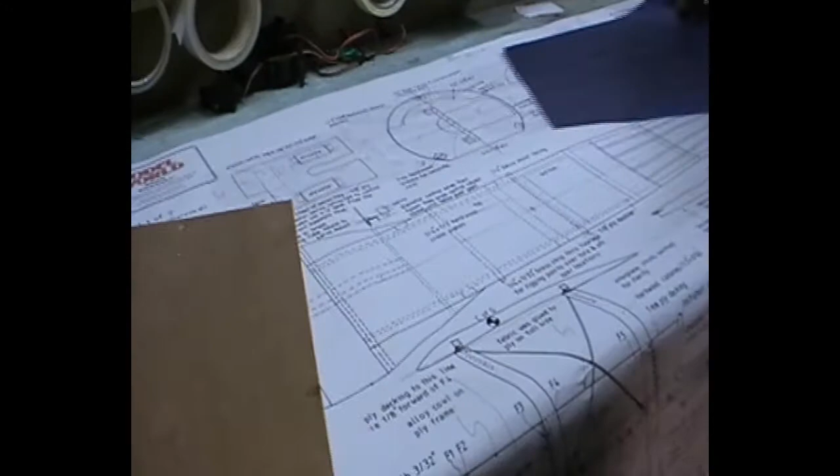Hiya. Right, this is a video to demonstrate the next stage of starting with the plane, getting all the bits ready, the formers and various bits and bobs. So if we pan over to the board, I'm going to demonstrate by doing the main firewall, former one as they call it.

So you just pick a piece of your ply. This is 5-6mm ply thick, because that's what I've got left in the workshop. But personally, if you've got 10mm, use 10mm, because you need the weight up front in a way. The more weight up front, the better it is. That's my theory anyway, though others may disagree.

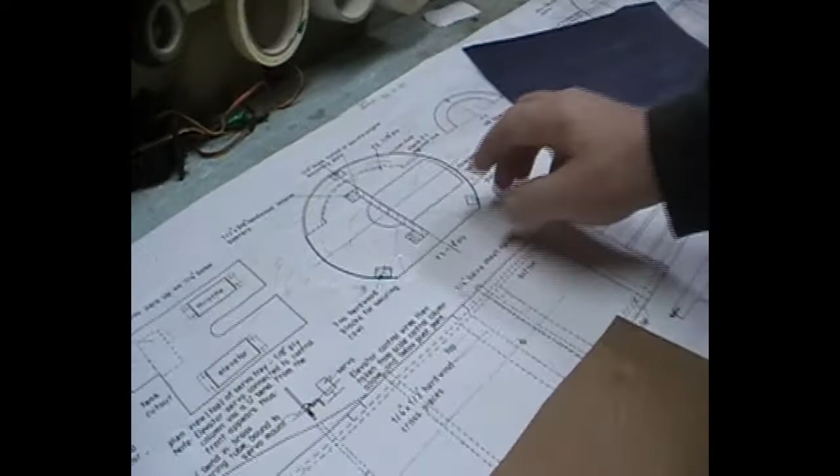So you get your piece of board, there's your picture, the tape's on it like I explained in the previous video, to protect the plan. It's just a little bit oversized, the board, so it gives you a bit of room. I always make two of them anyway, in case I make a mistake installing the engine and stuff. You just feel your way along.

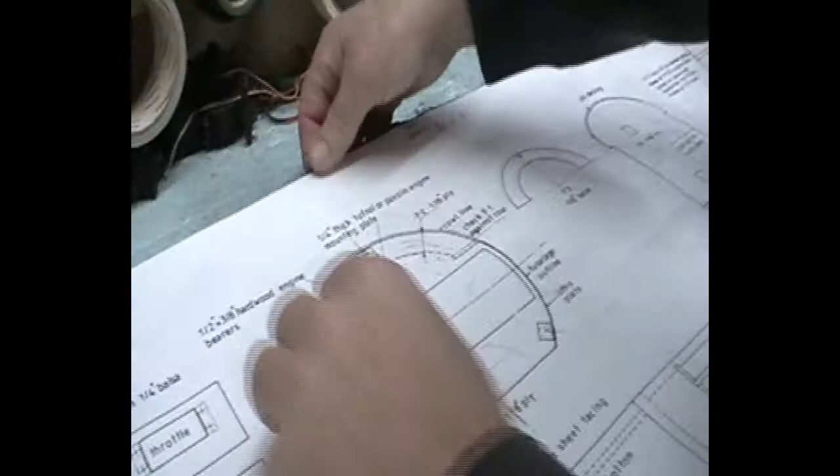There you have it. That's the important thing to remember, the line in the middle that gives you the centre of the actual foot plate. The best way to draw it, just pencil over the tape. Try to make sure the plan doesn't move, because that would be a bit of a pain. Nice pointy edge pencil.

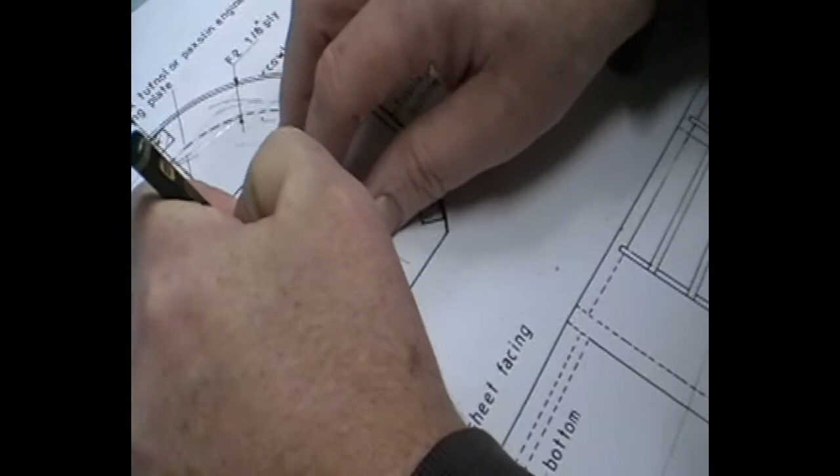Okay, that's right, it's just basically - you just draw out what you want to draw out. There's no point doing this bit and this bit, because that'll come another day.

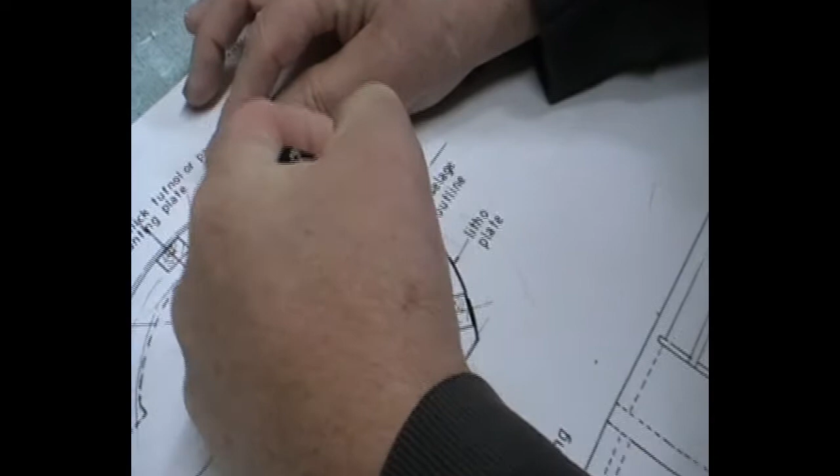And then you just carefully go around the edges, take your time. I'm doing this basically as one who's used to it, which you'll get used to once you do a few builds. Things like this come naturally.

The blue carbon paper may have made a difference. I'm sorry if my arm gets in the way of the video, but you can get the gist of what I'm doing. I've done this before.

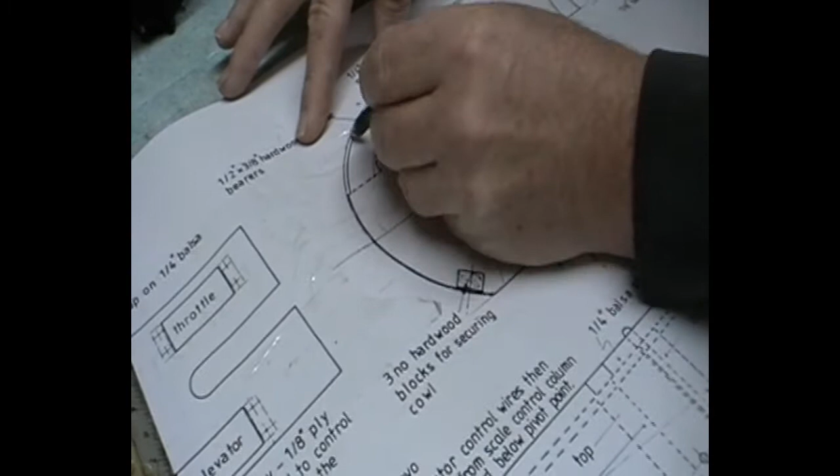Yes, you've got that, and then hopefully it'll come out. There you go, so it's come out now, okay, roughly.

And then what you do is, if you follow it around, I use a jigsaw. If you've got a fret saw and want to do it by hand, by all means, though you'll break it. So you just cut as near to the line as possible.

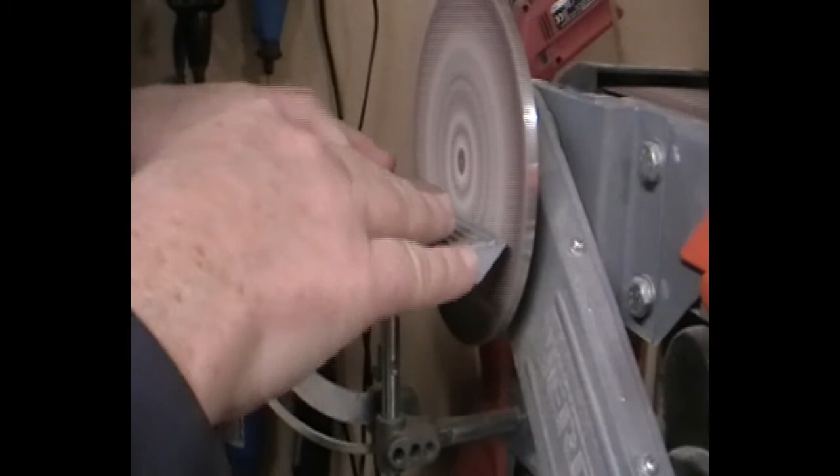So there you have it, right? So you've got your centrepiece there, so you know that's going to be where you decide which way you want to put your engine - upright, inverted, sideways or top.

But then, if you make a mistake, you've got one to play with, and it's the weight, like I said. So that's that.

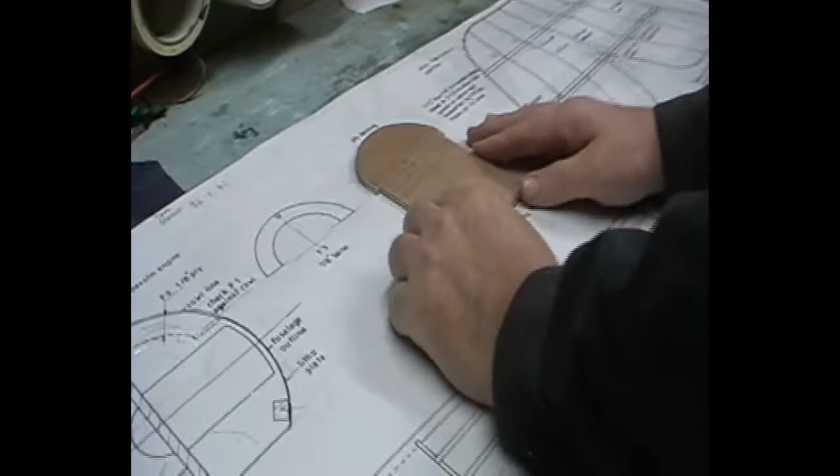And as you can see, I've done all the other formers. Obviously that one goes there, and you just make sure it's true to there. Then you look at everything on your plan, as you have, and you'll see that they're the same there. Repeat the process all along.

Obviously these are balsa, so you can use a blade. And you notice them there, and that's them all up there. Okay, so you've got all your formers.

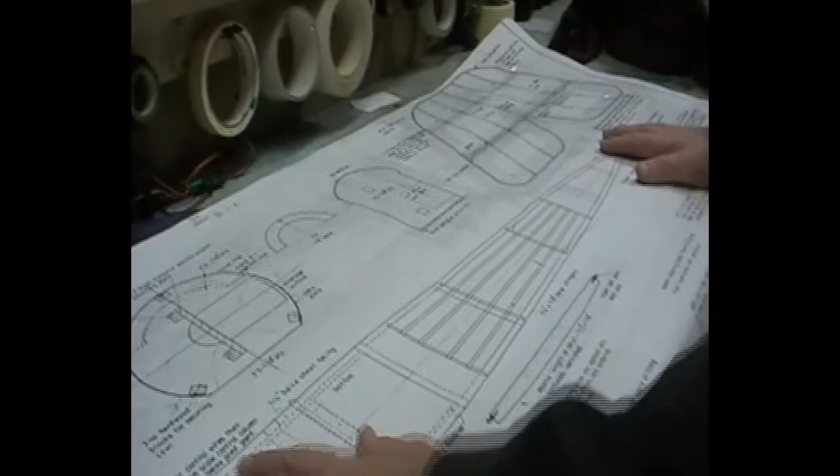Once you've got all your formers together, best to make it - it's like you're basically building yourself the kit, as if it was coming in a box like the old days. Alright, so if we move quickly on to the next bit, which is the same thing, but it's the wing ribs.

So I always make one particular wing rib, exactly the same process. Use the carbon paper, put it underneath the plan, draw it out, and then what I've done is I usually just get, as you can see, it looks like what you get out of the old-fashioned kits, before you had the days of computer printouts and laser cutting.

So you've drawn them all out using the same template, that way you know all the ribs are going to be roughly the same size. Now what I might add is these are blanks. What I mean is, because I'm going to build the wings slightly different to the plan, I've made these so I can accommodate the leading edge, the trailing edges and so forth, which I'll show in another video. As you can see, it's a very thin wing, just enough room for a flat wing servo to sit in between, literally. That's why I call them blanks.

So let's quickly demonstrate how to do this, since some people have asked. What I tend to do with these is, if I had a big long sheet, I'd cut them in half there on the jig. Then I get a sharp blade, and first time round, just track it with the blade. Don't go into it too heavy, just give it a nice cut like that, and eventually it will follow itself. See? We gently do it, that way you won't go off the line.

Same with the bottom one, just use the tip of the blade.

I'd advise, because there's about 48 of these on this particular model, whatever you like to drink, whether it be tea, coffee, lemonade or even beer, have one with you. It can get a bit monotonous, so just take a break.

But it comes out like that. The edges there you can either trim with a blade like I do, just roughly, because you're going to have to sand them all anyway. That's one way of doing it, and you just follow suit for the rest.

The other way of doing it is you could just cut them out rough and screw two screws through, if it was a big enough width for the rib, then sand them all, bolt them together and sand them all in one go, which is quicker on that sanding block. But I prefer to cut them by hand because it's more fun for me. I'm a bit mad like that.

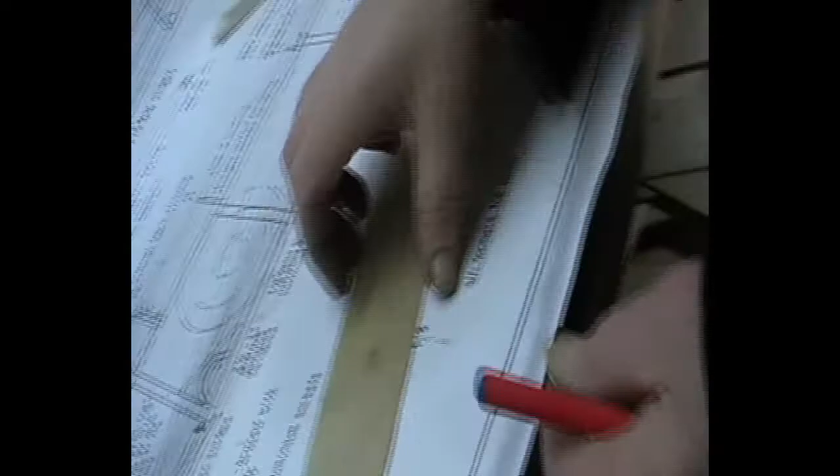All I do is get a really thin piece of ply, this is an offcut, actually packaging that came through, and I thought that's handy so I keep it. Basically what you do is first draw out a house shape, just a house, and once you've got one, you just draw around it like so. It's not rocket science, this.

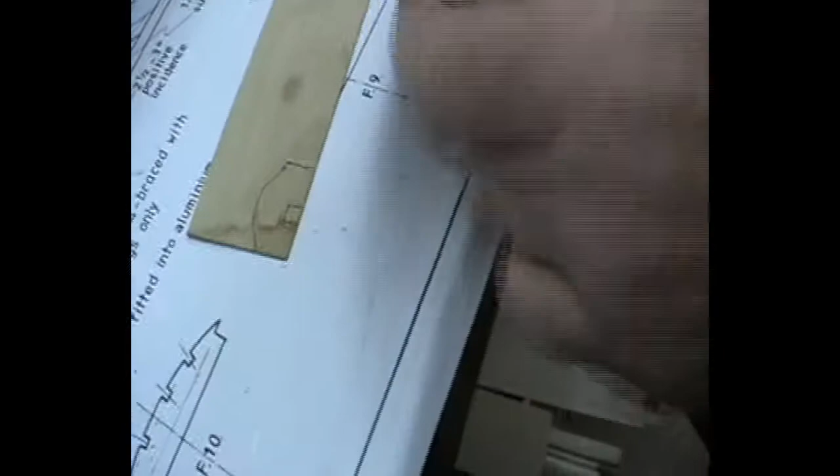And obviously you've measured out the width for your bottom longeron there, see, so it just sits like so. Okay, so you've done that, it's the one in the middle. Then you get an old pair of scissors, not a good pair, an old pair, and you just cut it off, chop it off like so.

This video will be about 2 minutes long, and it'll take about 8 hours to load up.

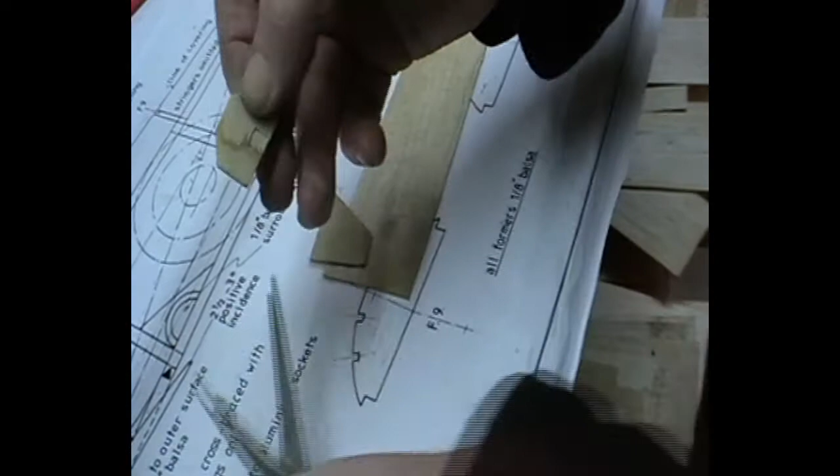Right, here we go. The trick here is once you've got these in, just cut them to your marks, then you get a pair of pliers things and you just go like that, see? And then they're on, see, like so.

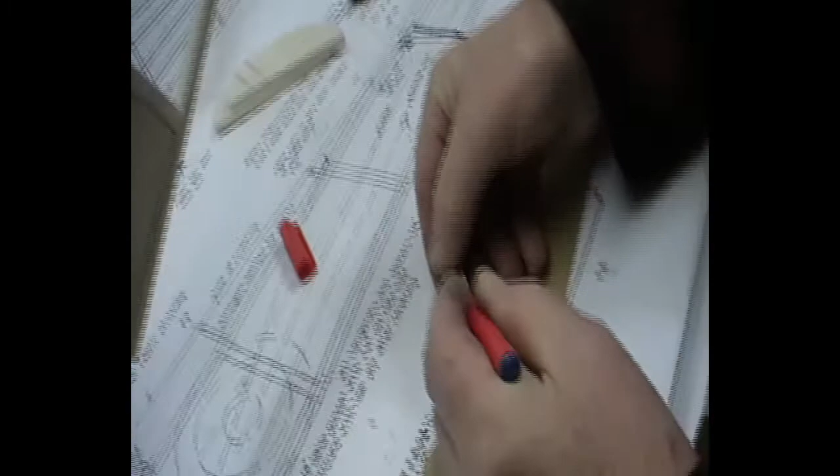Then what you do is butt it up against it, and then I get a pen and mark down the sides like so, so you've got a track, so I'll just pretend I've done it, right? That way you can see where you're putting your glue. I use cyano glue, put them on and then clamp them with mini clamps, which are like these.

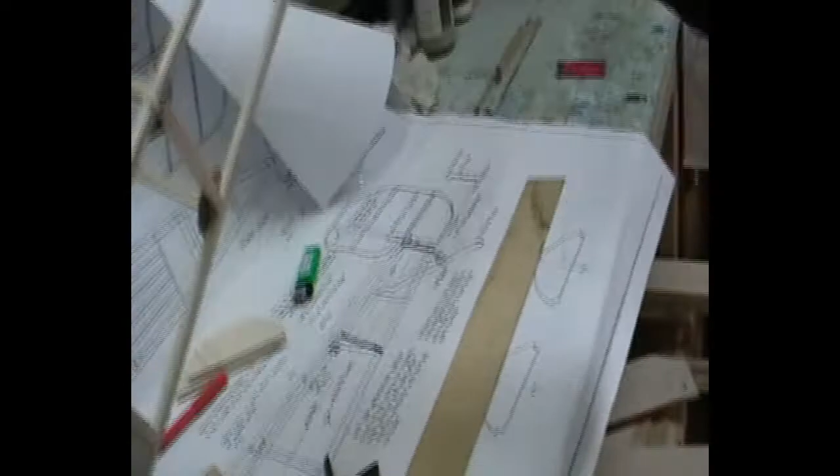Okay, so this is to put the rods in for the elevators and rudder. So I put one in, you cut your piece of dowelling rod - I do it the old fashioned way. So I'll show you the end bit. You've cut it to length, and you get your wire, hopefully this is all in the camera.

And then you get your 45 degree, 90 degree bend on there. I hope you can see this. So get it to 90 degrees, okay? And you're lining it up with the rudder, so you've got to allow for a bit of a bend. Which is probably about there. Okay, and you mark it.

And then keep it in the camera. Get it in the right line. There's your mark there. Okay, let's get the drill. And pilot hole it, so that's in line with the other side. You got the top one. I always do it this way - probably people do it differently from me, but this is how I do it.

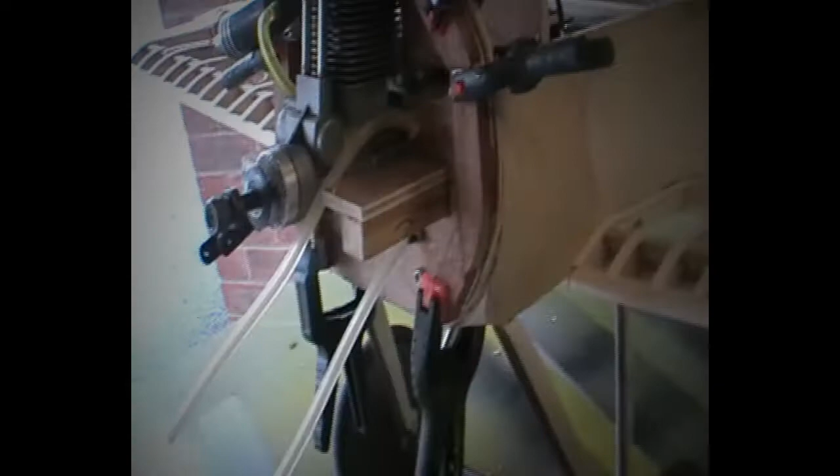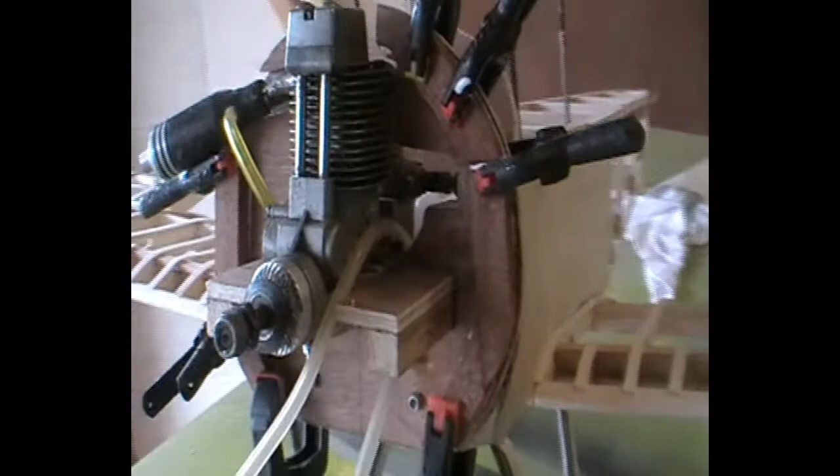Okay, whilst I'm waiting for other things to dry, I thought I'd do the bit to hold the cowl on. And I always do a solid bit like that - A, because it adds a bit more weight to the front, which is going to be needed, and B, it gives you that room if you make a mistake, you can always just drill it through again. So not little blocks, it's a bit stronger.

And it's just hardwood, very hardwood - just a bit of old scrap hardwood I had. And then you just cut it and shape it, and sand it to the inside. Better trying to keep it inside the firewall as possible, because it doesn't matter about the gap since the screws hold it.

And that's basically that for that. So, and that's PVA'd on. So that'd be nice, okay.

Here we are, lovely saucepan, brand spanking new. I got this from good old Wilkinson's, because finding a cowling for this particular plane is not going to happen. So I resolved to go into the local Wilkinson's because they sell pots and pans, and me and my friend Tony went round and speculated to see what would fit.

There's the template, hence why I said always make a spare template, because it comes in handy for numerous reasons. I took that with me and it fits in. You find the saucepan, if it's a little bit further out it doesn't matter, but this one, you see, it will go in, because it fits. And that's exactly what you need. So once you've got that in, you're happy days.

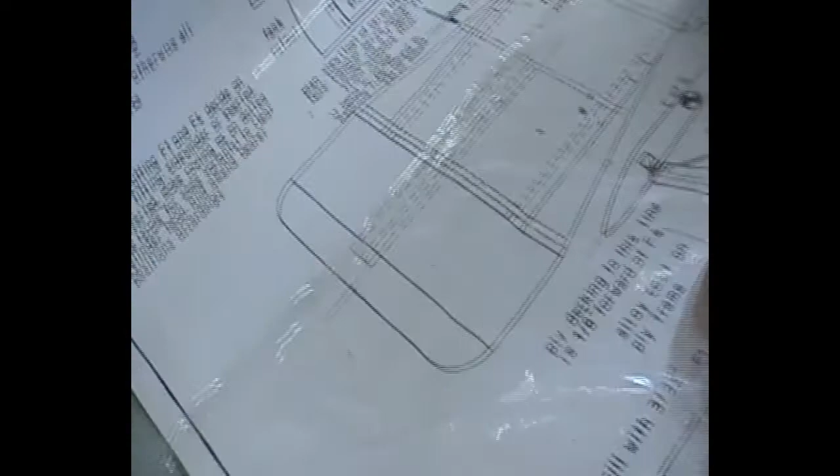Plus it's got extra weight on the front, because of the tail you've got that bit of extra weight on there. Okay, so just to elaborate what we're going to do, here you have your cowling there on the front, and it's almost to the right width. You know, what a bonus.

And this cost £9 because it had a lid with it, which I gave back to the guy in the shop, which everyone was kind of looking at me funny, but what do I need a glass lid for?

So next stage with this is, because on this particular plane the cowling - don't get air sick - if we pan the camera to this cowling here, it's obviously got that much on the front, but on the snipe it's further in, so you've basically got a lot more frontage on the cowl than you would have on these type of planes. So it's going to be a lot less, you know, diameter cut out of here. So keep getting really airsick now.

So what you do, again, best thing to do is look at the picture of the real aircraft. I don't have a hand at the moment, and you just find any circle like a tin, you know, that's a perfect circle. Hopefully that'll be the right size, but this is just an example.

Then you get your marker, you cut around it with a marker. That's your first job - cut that circle out with just a normal jigsaw with a metal blade. That'll cut around it eventually. Take your time, cut around the mark, and that way you've got your hole ready.

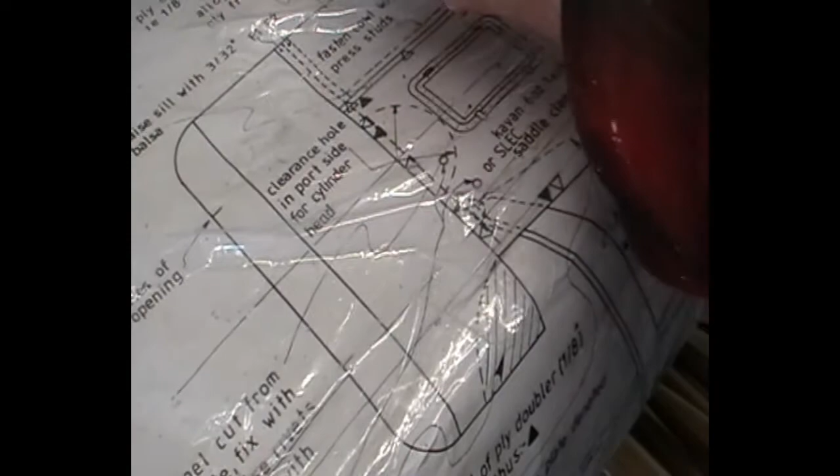Once it's all fitted on, this won't matter - you don't need to worry about that, because on the plane here it's cut out, so you're going to have a nice shape at the bottom, like a half moon shape. It comes out at the bottom, so you've got that. So this won't really matter. You could knock it off if you want, but it's just an extra bit of work you don't need. But you might have to take it off to get the blade round, so that'll have to come off anyway.

But then you mark that once you've got it on the fuse, and where you've got your exhaust coming out, all these things you mark and drill from different pipes and stuff, and that is your cowl ready. Then to get rid of this Teflon-y look, you just wire wool it with methylated spirits, and that'll all come off and it'll be as shiny as that. Just a bit of time, a bit of elbow grease, and there you have your nice shiny cowl, ready to go. Nice bit of weight, everything's there.

If you could buy one of these online or whatever, I believe - because this is a lot smaller than the normal size that I use - it's about 25 quid, and this cost 9 quid, so it's worth a bargain. And if you do make a mistake, at least you can go back to Wilkinson's or Wilko's, whatever they call it now, and get another one, half the price. So there you go, budget bargain.

Right, okay, so when I come to do this, I'll do another video. And there'll be loads of bleeps in it, because I will swear loads when I'm trying to cut this hole out. Okay. Bleep, bleep, bleep. Jelly. Right, okay.

Those magnificent men, those magnificent